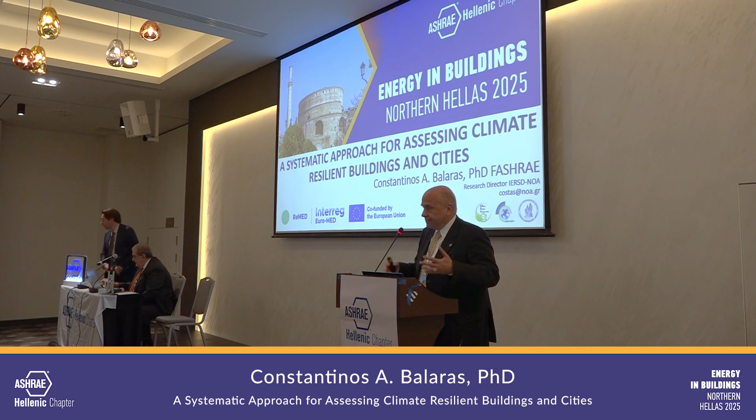I have the pleasure to present some of our recent work within a European project called ReMED. It's a collaborative effort of 9 partners from 5 European Union countries, and we just completed the first year, so it's an ongoing project. I'll share some information that might be relevant to position what we're doing, and maybe generate some interest so you can follow it up.

If you pay attention to the keywords we had at the beginning, let's agree that yes, we do have a problem we need to address. Sometimes we give it different buzzwords - climate change, climate crisis, and so forth. But we do have evidence that the way things are going in terms of human activities and impacts on the environment result in really significant changes and events.

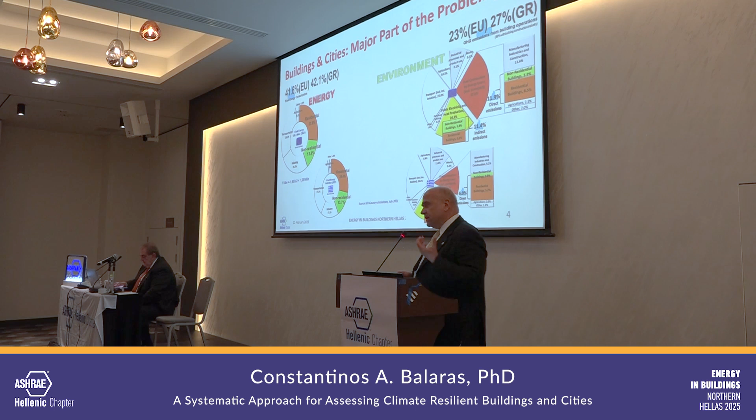We know, and from the engineering point of view, once you know the problem, then you look for solutions. This is how things will look in the future. We are on a trajectory to resolve these issues and reduce our energy consumption. As we reduce our energy need, by 2050 we're aiming to have very small amounts of energy - not zero - balanced by ways to either remove or absorb carbon from the atmosphere, so the net balance would be zero, but we're still going to be consuming some energy. Who's going to play a key role? Our buildings. If we're going to succeed in this downward trend, we need to make sure our buildings respond.

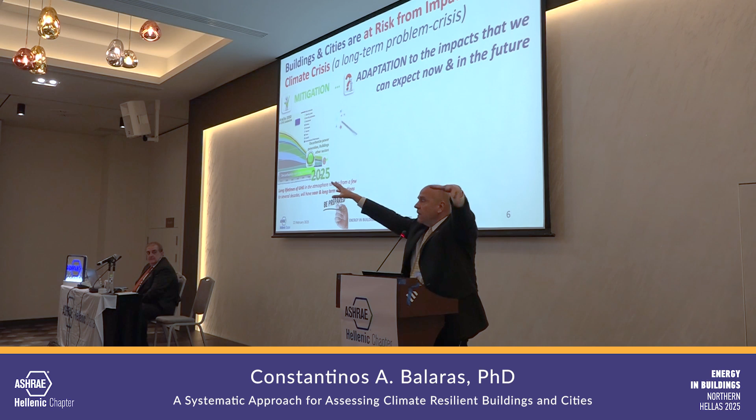I have the power, and right now I'm just going to take you to the future. Take you to 2050. Almost zero energy used by our buildings. Okay, so that's what we need. Are we done? Well, let me tell you, not really.

Because all the damage we have done, all the emissions we've been pumping into the atmosphere over decades - guess what? They're going to be there for years and decades. So the damage we've created is not going to be solved overnight, regardless of what we, with my magic rod, could have been able to do today. So we have to be prepared. We have to adapt. We have to be able to handle the issues and damages and problems that we can expect and are actually experiencing today and in the future.

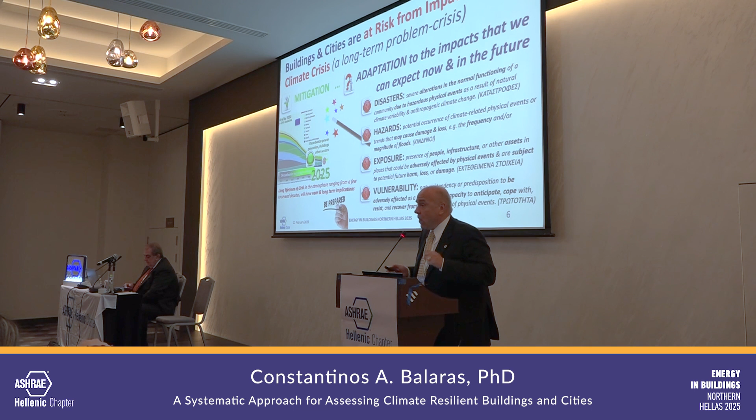In that, we're going to be seeing disasters, we're going to be seeing hazards - we have to control the exposure and our vulnerability to all these events. In that preparation, when we refer to natural hazards, what are we going to experience? We're going to experience more intense, more extreme, more frequent issues, problems, and events. What these may be, well, you all know.

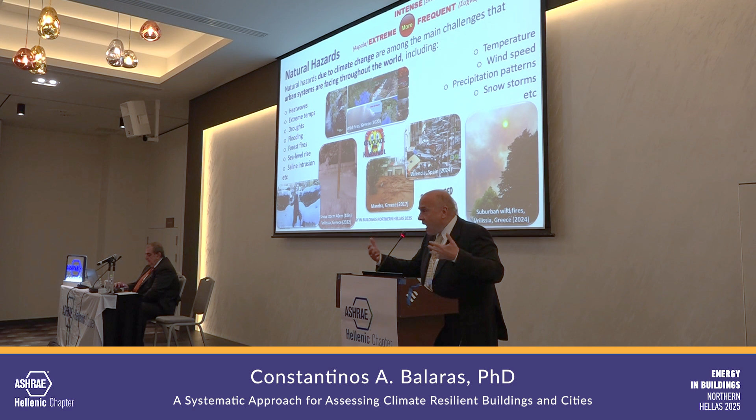We are all, no matter where we live - in Greece, we're experiencing, and a lot of people say, well, you're suffering because you're down south, heat waves. But we're also suffering from extreme cold waves. We're also suffering from snowfall. Over the last decade or so, even in Athens, almost every year, every winter, you have snowfall. So extreme events that go from hot to cold, from rain to dry spells, and that also have impacts on various other activities, agriculture, and so forth. So the key word, the underlying word, is we need to be prepared.

Now, in terms of preparing ourselves, we need to look at our urban environment. Regardless of all the situations, we need to be prepared, anticipate, and find ways to respond to these events. So the question is, this is a complex issue. How are we going to do all this? How do we decide, and also how do we assess first where we are and how much we need to improve?

Not a straight answer, not an easy problem to resolve, and that complexity demands organizing a very systematic approach and engaging different experts. The first step, when looking at our urban environment and our cities, is to look at the specific elements, the buildings. If we start with our buildings, then we multiply, we grow, and we can cover the urban areas, the cities.

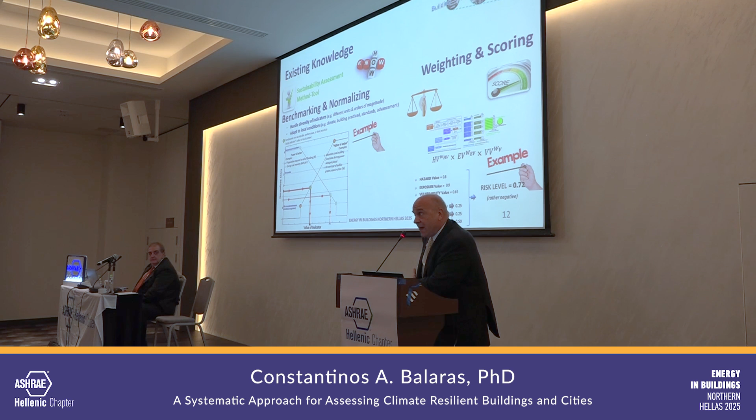Now, once you get these tools, you don't need to do any of this work, because this is already done - it's in the background, behind, and already built into the knowledge that you get. So using this idea, we now carry it from sustainability to assessing, as we said before, the resilience of our buildings and of our cities.

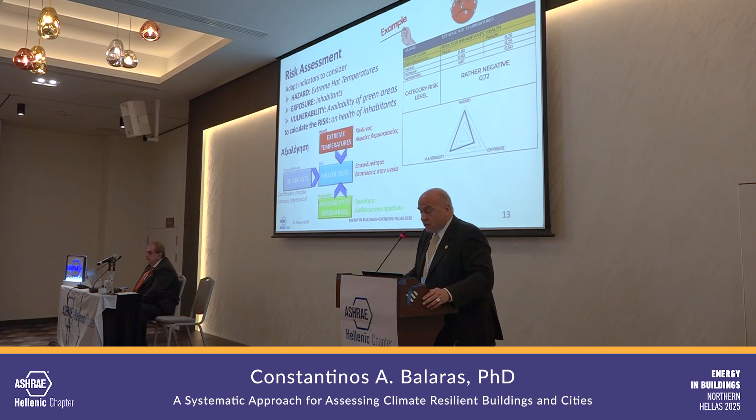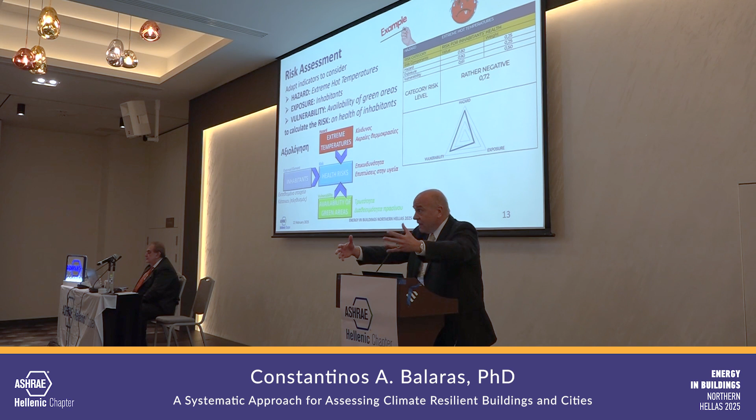So now we are using different types of indicators, and here giving some examples that you can assess. For example, the extreme temperatures, and other characteristics of an urban area, how many green areas and the amount of land that you have, open parks and so forth, that improve both in terms of reducing temperature and being able to absorb rainfall. And of course, whose impact this are the people and how many people you have in that area.

Putting it all together, in the same similar fashion, you can actually articulate the work and be able to help. Also, starting last year, what we did is not start from zero. So that was our existing know-how, but we also looked at what other systems and methods are out there available in the market.

Also, what we have available as existing knowledge is efforts being performed at the EU level, where every member state actually goes through the exercise. We do have a problem, let's try to face it. So they call upon each member state of the European Union to perform an assessment of the issues they're facing today.

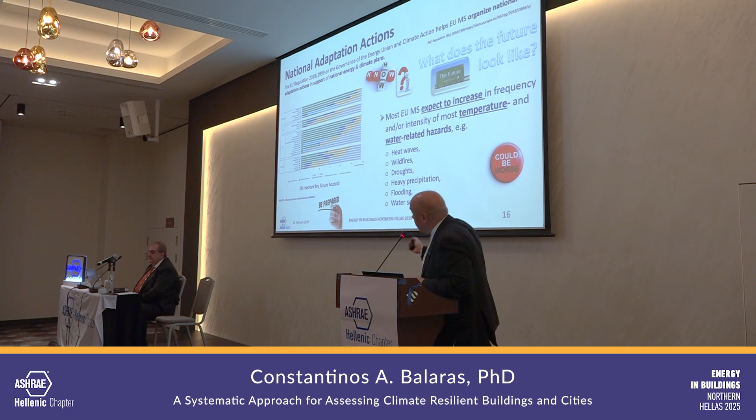Now, within these plans that each EU member state is performing, they also ask them: what do you see coming into the future for your area in terms of projecting and expecting higher implications? And the big response from all of them is don't expect things to get better. Things will get worse.

So again, in terms of priorities, there is some kind of information of what we need to address. So within the work that we're performing, where are we? We are defining, as we speak, these indicators, that's why I didn't get into the details. That's why I gave you the example of what we already had in terms of assessing sustainability. So that's where we are. We are also defining our benchmarks in order to make them practical.

All this information is going to be compiled within a tool that will be open and available, so that if you're interested, you will be able to access it and use it for free. It will be primarily of interest for municipalities that need something practical they can use in their complex work, and of course for you as professionals in order to support this type of work. How are we going to make sure this is going to work?

We're going to be performing case studies, pilots, so that we will validate the method and the tools. In Greece, the National Observatory of Athens is one of the technical scientific partners. We're collaborating with another partner, Municipality of Fyli, on the west side of the metropolitan Athens area, where in Greece we are going to be performing our pilot and see how it works in the field.

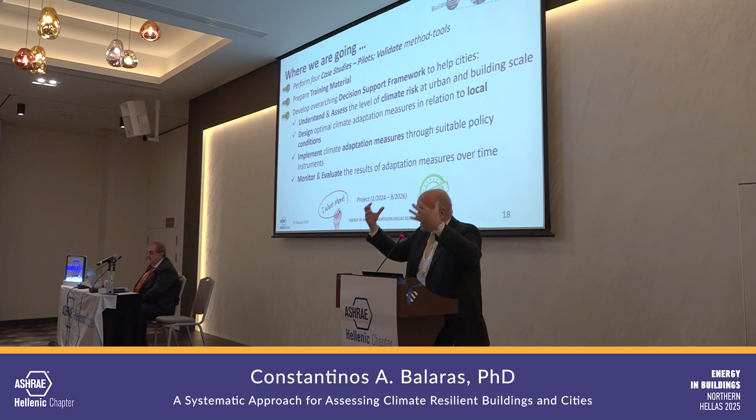There's going to be training material, information that you can access to understand better these complex issues. And all this is going to come into a decision support framework, so it will have the structure that you can take and implement in order to handle these complex issues. So a lot of good things are coming up.

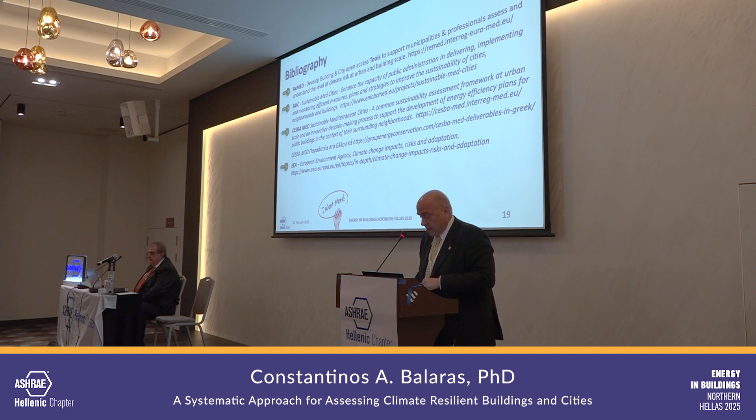I've provided here some bibliography for you if you're interested, especially for what is available. As I said, this method for assessing sustainability is available, you can access it. Some of the information for our Greek audience is also available in Greek, which is important, since sometimes the language can be an issue. But most important, the information is adapted. So we have a tool for assessing sustainability of buildings and of cities available in Greek with all the adapted indicators and so forth.